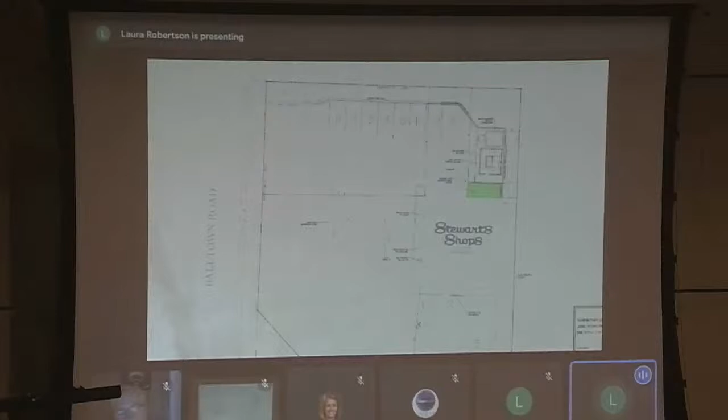For whatever it's worth, Mr. McPartlin, I focused all of my comments today for the ZBA recommendation on the area variance and the few items we had left over. We would still have to take this to site plan if you come back in front of us. And I think we can have a good discussion around what you could actually do with that freezer, because we did bring this up last time.

I'd recommend that if there was a way to get this to look as best as it can, that'd be something we'd definitely like to hear about. Yeah, I'll return and review. The one thing is that when you do change the paint, the freezer matches the building better.

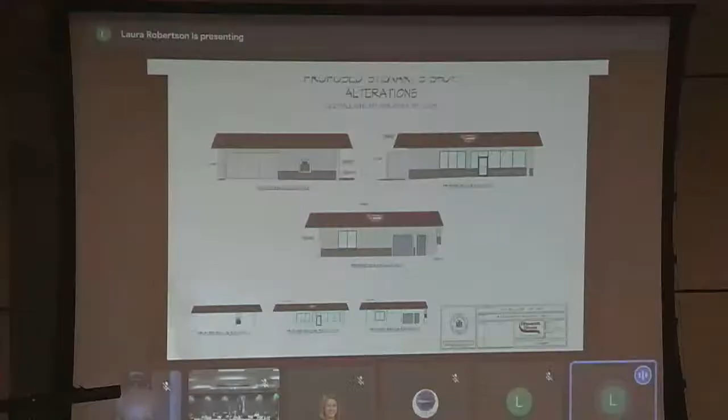While it is an ironclad box, I'm not disagreeing with that, it is what it is. I do my best to not lie. But I think the paint will be a little closer when it goes to the hardy board, so we'll bring it into a little bit better. But I'll see if we can screen it in some other way.

Thank you. So the other question is, are there any other conditions we're going to be looking at for this site plan? I think if I recall, it was pretty straightforward. It meets all the requirements as long as they get the area variance from the ZBA. That's the only critical path item, right, Laura?

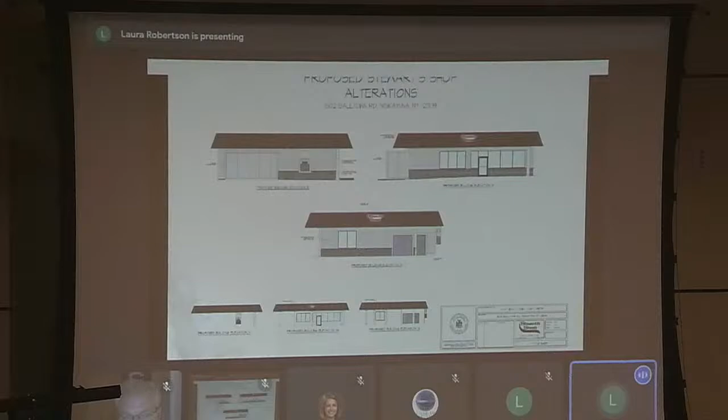Yeah, the only thing Complete Streets brought up was to paint the crosswalks because they're starting to get a little faded. They also noted that this is a significant outdoor seating area for Stewart's, like high schoolers eating ice cream, and there's really limited outdoor seating. So they were wondering if, since we're touching it, we could look at places where we could add more outdoor seating.

But those are site plan items. Yeah, we'll review and look, but I think, to Mr. McPartlin and Mr. Khan's comments, the site itself is very constrained. Unlike other Stewart's, we don't actually own this land, we lease it. So one of the other constraints here is the long-term ownership of the property, where we can't alter it. In sites that we own, we're more willing to work to do different things. Here we are a tenant.

So the other question is, are we close enough to call for a tentative resolution since we're 3 weeks out to the next planning board meeting, and the ZBA is meeting prior, right? What, 2 weeks, ZBA?

So we could have conditions for the paint and striping being updated, and we could also have a condition at the ARB to take a look at the freezer cooler to see if there's any kind of cladding that can be put on it, or if the colors are adequate, at least make a recommendation. We could do that if everybody thinks that's okay, or we could wait to the end of the month.

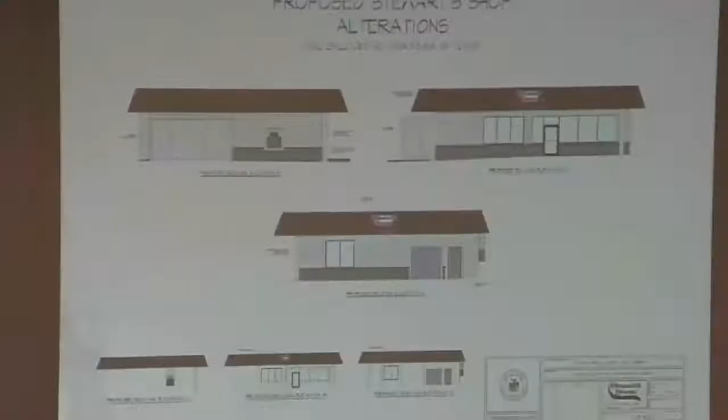Yeah, all refrigeration. So one of the things we had talked about earlier in a previous meeting was the location of the condensing unit and the condenser to be put towards the rear. Also there's going to be piping generally attached to the outside of the coolers. There are jackets and sleeves that can cover the copper piping, or insulated jackets that can go over them that are a little bit more appealing visually.

So if you know the actual brand, I'm sure they have a shop drawing or a layout drawing that would show that. It may be helpful to present at the next meeting so the board can take a look at what the unit actually looks like. I can also get pictures.

So the question is, do we still go forward with a tentative resolution, assuming they get their area variance as a condition? We'll know whether they got their area variance because it's ZBA. And if we're not happy with what your research shows, we could always pull the resolution.

Yeah, and I'm okay with the tentative resolution, but to the points we've all made here, I think you know our desire relative to the look of the freezer and the general area. So if you can do your best to accommodate that, at least then we always have the ability to pull the resolution, but if we didn't have to pull it, that'd be a best case.

Yeah, I'll drive that way back and look. I know that unlike many of the other Stewart's, there's no parking in front of the building, which again is atypical. Again, because it's a site we don't own, and we didn't design the building, we retrofitted it. But I'll take a look to see what we can do.

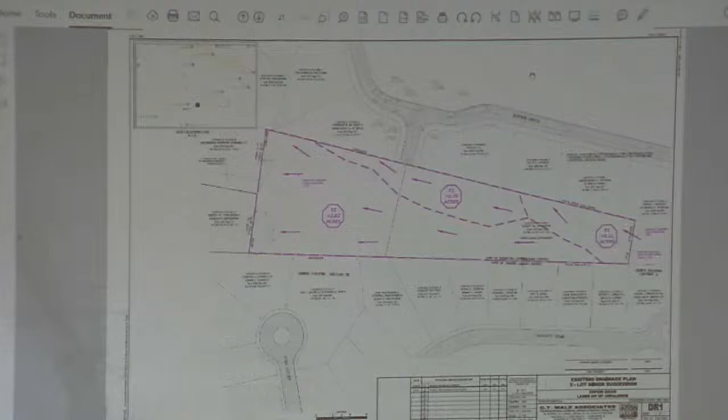Okay, since the last time we met— Oh wait, Owen, can you identify yourself? Yep, and also pull that closer. Owen Spoolstra with CT Male.

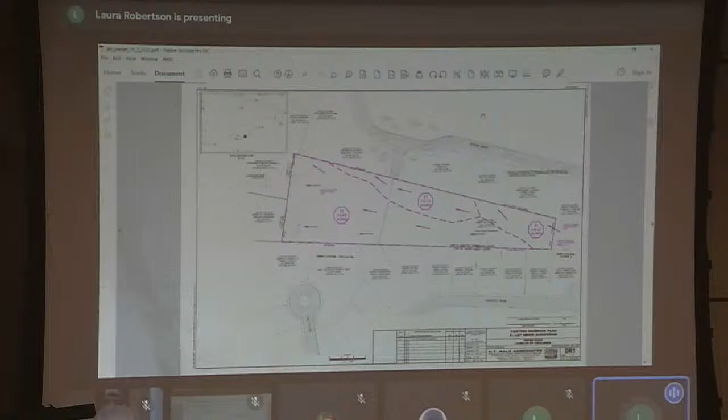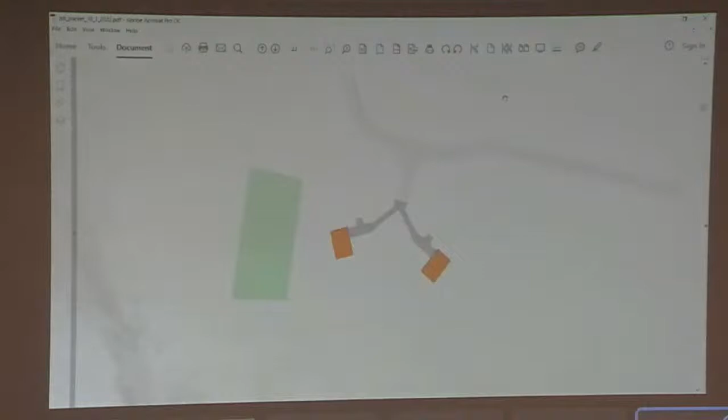From the last time we met, we prepared a drainage report for the site. What we're proposing is still the swale along the northern property line to divert the water around, so none of the water from the driveway or houses will drain towards the north or the Empire Drive lots. That water would flow from around the houses, either to the north of the houses or the south of the houses, and be directed to a...

...gravel diaphragm at the rear of the proposed area, to be cut towards the rear of the house on lot 1, the rear of the lot yard. That gravel diaphragm would take any water that's gotten concentrated, would direct it back into a sheet flow, and that flow would flow overland through the filter strip that's approximately 120 feet wide.

And that's the treatment practice that we're proposing. The Stormwater Design Manual allows for filter strips to be used for this kind of situation. The theory behind it is that the water is sheet flowing and it will perk back into the ground because it slows down the velocity, dissipates the velocity of any concentrated flow, and so it gives it a chance to percolate back into the ground. So that's what we proposed with this site.

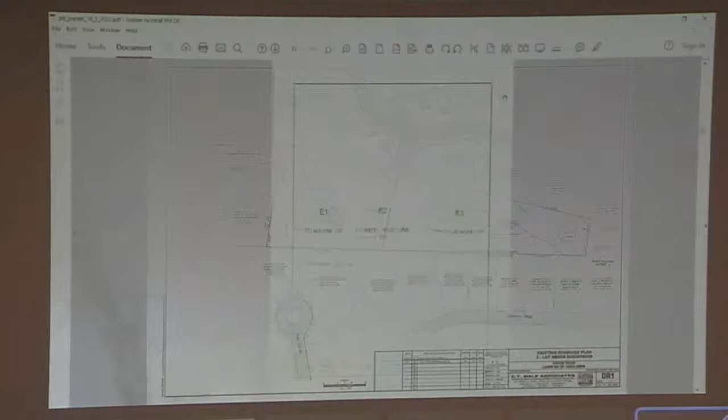Page 21 of the packet, found it - it's where it shows E1, E2, E3. If you look to the far right of the drawing, there's what looks like a copy and paste error. It includes 18 self-service vacuum spaces. Did you catch that? I caught that - I don't think it's in that one now. It's at the top, I believe, in the one that went out. Something was in a copy-paste and probably ended up in the drawing. That was from a Hoffman's car wash. Yeah, that would make sense. Okay, just wanted to point that out.

Okay, no more design work - we'll capture what needs to be maintained and send it to the town designated engineer to get an overview of the work. And then the tree council will also take a look at the large trees that were mentioned tonight, at least to identify where they're located, whether they're to be removed because they're within the building envelope, or whether they're outside of it. The tree council will walk the site and help us out with that.

Typically, all trees within the building footprint and the driveway are allowed to be removed. The tree council is really just looking at clearing on the edges - if it's close, then you save it, or they flag it. But trees in the footprint of the house can be removed.

Understood, but the public had a concern with the large oaks and we're not sure where they're located. So as they do their walk, maybe they can help us out with that - whether they're to remain or not. It would be nice to know.

I just had a question - the area for the filter strip, is that put into a conservation easement, or is it just maintained as part of the stormwater system as an open forest area? How does that work?

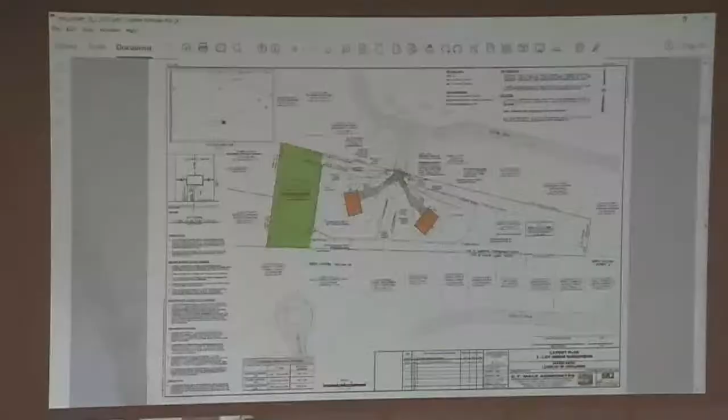I thought you did a very nice job with this stormwater report. I would propose that whether it's Owen or the TDE, because we did have quite a few people with concerns about drainage, someone kind of explain that report a little more thoroughly. I looked through it very carefully, and you could figure out the design inputs and the outputs. But one of the things you have going for you is very good soil, the best of the four soil classifications. So it might be good to explain it in a little more detail, how HydroCAD works, from a really top level.

That's my suggestion. Sure, now or at the next meeting? Maybe at the next meeting, not now, but at the next meeting.

Just a concise explanation of that, because it's a nice document, but I think some of the neighboring people might not be familiar with a drainage report. Okay, and that can go hand in hand. If we get any comments from the town designated engineer that you need to respond to, I guess we can do that all at once. That would make sense.

All right, so we'll get that off to the TDE. I think that's it, right? Is there anything else that we need to take care of right now? You're getting close. All right, thank you, we'll get all right, thank you very much.

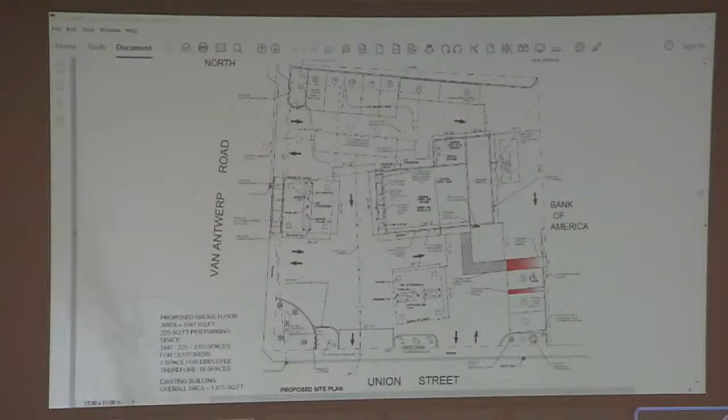This is the one that was in the packet. How does the latest proposal differ from what we have that was in our packet, Mr. Kaufman, for the lighting? Just anything in general. I do have some renders, some better renders. I can't remember if I emailed them to you or if I have them on paper here. Let me show them to you, I can pass them over.

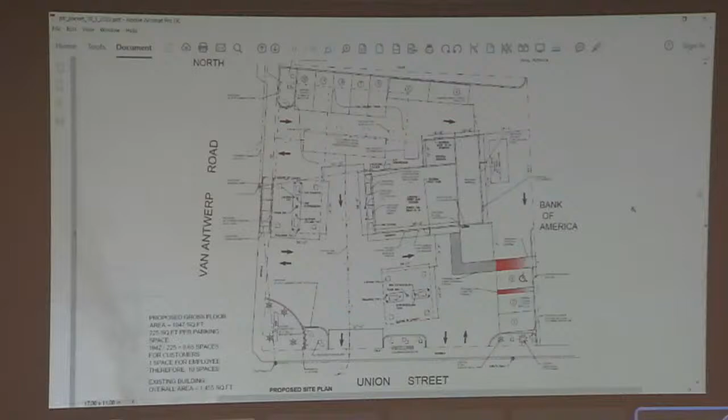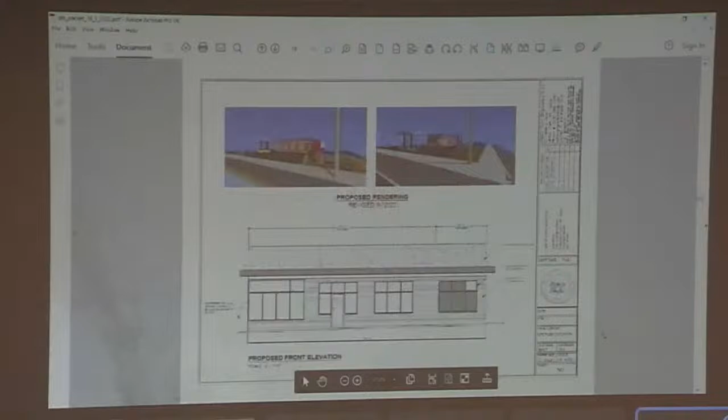Oh yeah, that's for the old one. This one's more zoomed in to show the actual doors, on the one being passed around. So that one shows there was a door in the storefront to the left that's being filled in. Yes, yeah.

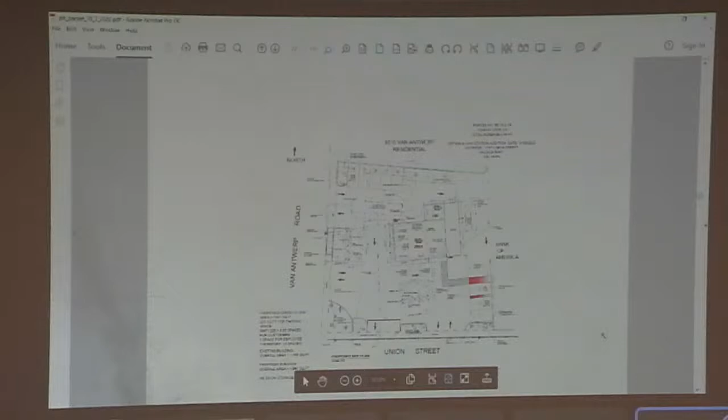So a couple of the updates are the southwest corner has the ingress and egress changed to just the egress. Yes. And then the other thing along Van Antwerp Road shows a raised sidewalk and curb. Yes, that's the next thing I was going to discuss.

So I had a chance to take a look. I actually saw a gas delivery the other morning there, and the tanker truck does come in at the back of the lot, does come back out, watched it fill up. The only concern I have about improving the sidewalk with a raised section in that location is that, because of the proximity to Van Antwerp Road with the county that plows that road and also maintains the sidewalks along Van Antwerp, I think that concrete curb and sidewalk is going to take a pretty good amount of abuse from plows.

That was one thing I was a little worried about too - how are we going to raise it, and the question is how much to raise it. If we raise it up a half foot, yes, it's going to take some punishment from the plows. And then also, what kind of buffer area do we have? Do you have a buffer area of asphalt both on the property and next to Van Antwerp?

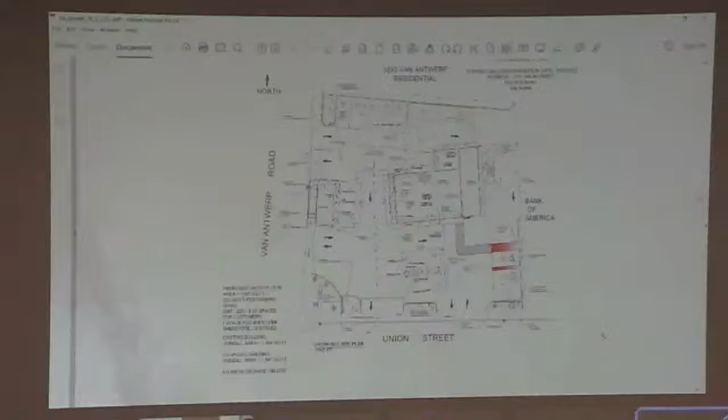That's a good question. If it did that, I'm not concerned about plows at all. I probably do want to raise it there because that's a straight line, and that's really acting more as a deterrent for cars cutting through.

Okay, you're talking about right at the corner itself, right at the intersection? Yeah, as you know, Van Antwerp has a raised sidewalk until it gets to your parking lot, the applicant's parking lot. So then it's going to go down because there's a road access, and then it's going to go up in the middle, then go down, then go back up at the end, I would assume, to delineate that this is a walking path, so that all plows would see a straight line coming down Van Antwerp.

So you're talking about all the way along Van Antwerp? I thought that's what would be proposed, but you're not incorrect. We really focused on just by the pumps in our discussion. That's what we were focusing on. It can be revised, I just want to ask the question.

No, if it were a straight line all the way to the corner, I would be less concerned about a plow being able to find a line of sight. So you're saying if we get curbs along all three spots, basically raising it up.

I think what you're saying is on the site plan, right where the monument sign is and also the telephone pole. So where's the curb? The curb is just west of the telephone pole proposed, right? The telephone pole would be in the sidewalk about a foot. Is that what you said?

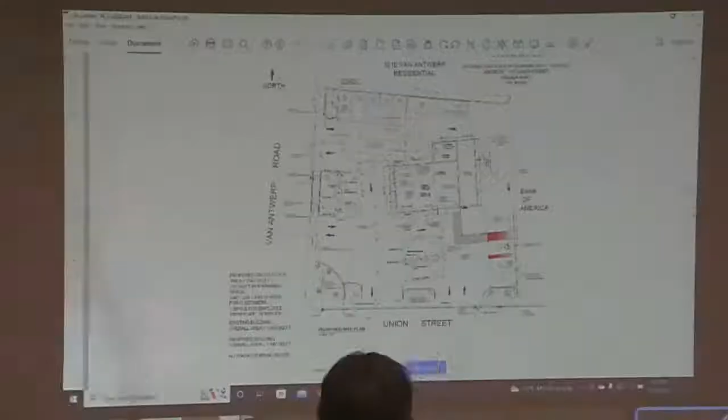I think the discussion is, if you provide a raised sidewalk over here, am I getting that from the local plans point of view? That's what they're trying to do.

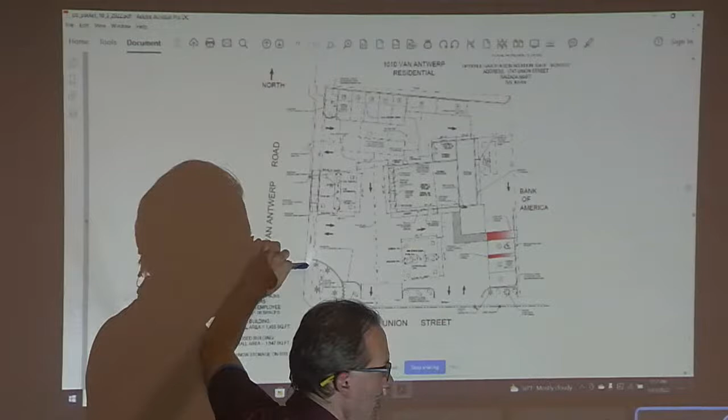Consistent with the rest of Van Antwerp, to raise the sidewalk over here. And then the other question is also, do we put some kind of raised sidewalk over here also, and in the middle also? Three locations, is that true?

I think that's a given, that's where we... The question is, do we raise up? Yeah, see, that's a good image right there.

You could just follow the line all the way down. Basically, are we gonna raise, this goes down right here to this driveway or this house, and then there's nothing raised. So the question is, this has already been removed, of course, but are we gonna raise up this area? And then scroll down.

Are we gonna raise this area over here? Actually, I have a question for Laura. Can you go back to the other perspective? No, just the other angle that you had of the streetscape.

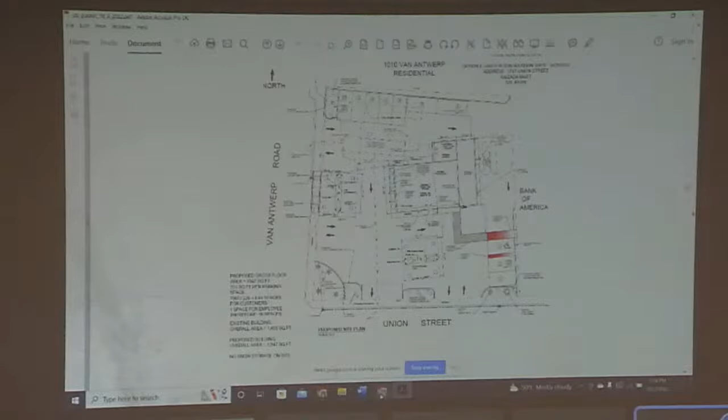Does the jurisdiction change between Schenectady and Niskayuna? The sidewalk is not aligned with the sidewalk that's on the applicant's property. Why would that not continue all the way straight down?

There's no jurisdictional change, but sidewalks don't have to be directly on the edge of the road. If they are directly on the edge of the road, they often have that curb like you see here. This isn't the most beautiful of inset sidewalks, but a lot of times you'll see an inset sidewalk that has grass - edge of pavement, then grass, then the sidewalk. This just happens to have edge of pavement, then asphalt, then sidewalk, which I think is another reason why it feels like you're walking through a no man's land, even though you have a concrete sidewalk going through there. Mr. McPartland raised this last time, and I was looking at it just from the extensiveness that it would require.

This sidewalk eventually should actually be raised in strategic locations around the entire property, shouldn't it? And that was what Mr. Fromm further said, not just the 3 points you mentioned, but also on Union Street. I think that's part of the complete streets.

When complete streets, I don't know what your complete streets plan of the whole town of Niskayuna is. Because the sidewalk becomes flat on Union by the bank, right?

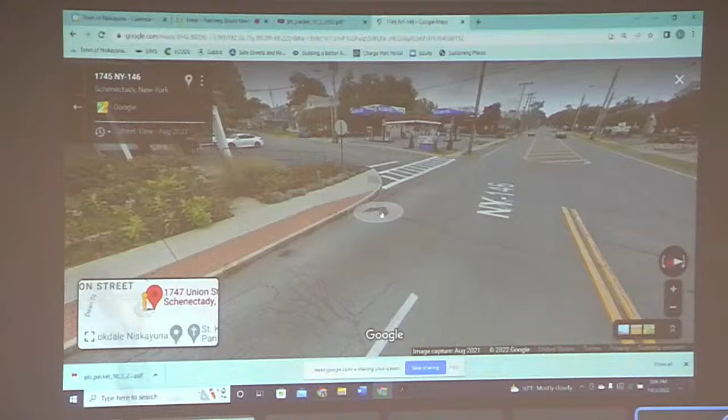Is the client allowed to do that? Did Metroplex do that work, the sidewalk improvements there, to that corner? I'm not 100% sure, but I believe the line between the town and the city is very close here. Yes, it cuts through half of the pizzeria and then comes down and slices back through the rear of Stewart's property.

It's unfortunate that as a pedestrian, when you enter the town of Niskayuna, you're greeted with less of a sidewalk, I must say. Well, if you go onto Molino, that's raised.

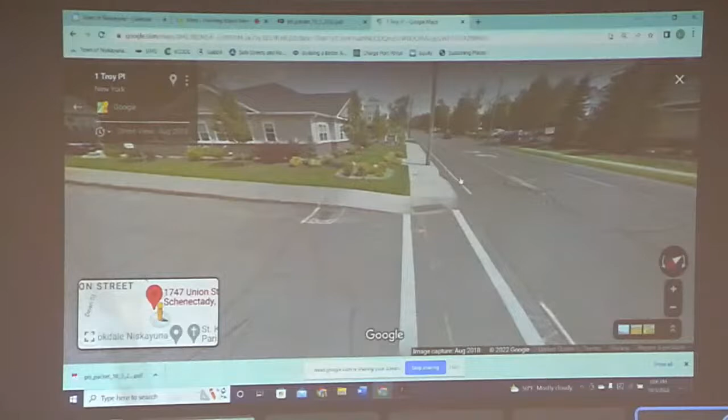Molino got a bus stop there, yeah, it's raised over there. We did that when we did the... correct. It's just inconsistent, but I'm okay with concrete. The grass is nice, but it's hard to maintain that small strip, especially winter after winter.

It's easier with road salt. So you're talking about actually curbing Union Street as part of this site plan? Well, that sounds like even more work. I guess, echoing Mr. Laflamme's question, I was not aware that there's no curb on Union Street.

There's no raised curb on Union Street, correct. Even on the corner, which seems like an area where you'd want a raised curb, because that's where pedestrians queue to wait for a safe moment to cross. There's a crosswalk, but it's not raised, it's flat, and there's not even a light that says this is time to walk, this is not time to walk.

Raising the sidewalk there—right now there's an ADA ramp there, but nothing's raised there currently. We just have the poles. For all intents and purposes, it's basically flat on the entire property, at road level.

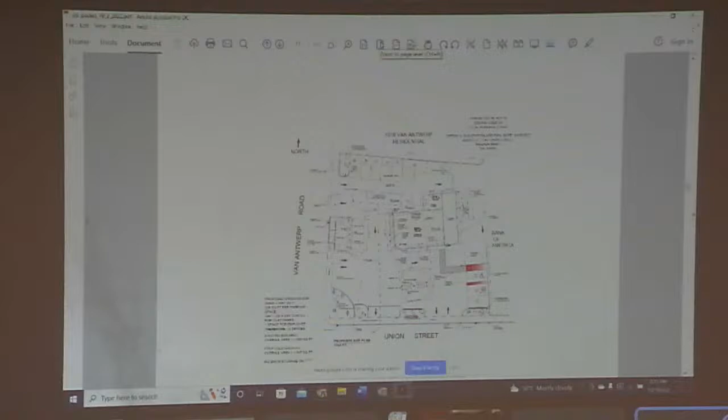Next up is 2209 Nott Street, and that's the broken in. We have Mr. Nicky online tonight. Yes, good evening. How are you? Great, thank you. I think what we just was, we have a brief discussion.

We don't have anything new as far as submittals, but you're going to talk about maybe a discussion with Metroplex or something along those lines? Yeah, just real briefly, we will have our drawing updated for the next meeting. I didn't want to be on the agenda and not address the board. I did do a walkthrough with Jamie LaHutt from Metroplex, myself, a representative for Carver, and Dan Lang as well of Lang's Pharmacy.

It's my understanding that Metroplex intends to pave the parking lot on the Clifton Park Road side of our building beginning 2 weeks from today on October 17th. I'm under the impression it's going to take between 3 and 5 days. And at that same point, it will not be raised, but they are going to stamp an area to essentially extend the sidewalk along the Clifton Park Road side of the building just past our side entrance door, which helps in terms of the plans that we are trying to get approved.

For both surface and also to delineate where the sidewalk is from where any outdoor seating area and any parking area might be. Other than that, I don't have anything more to report except that work apparently is being done 2 weeks from now, and myself, a representative for Lang's, a rep of Carver, and Jamie LaHutt from Metroplex all met to see exactly what they plan to do, and that's where we're at.

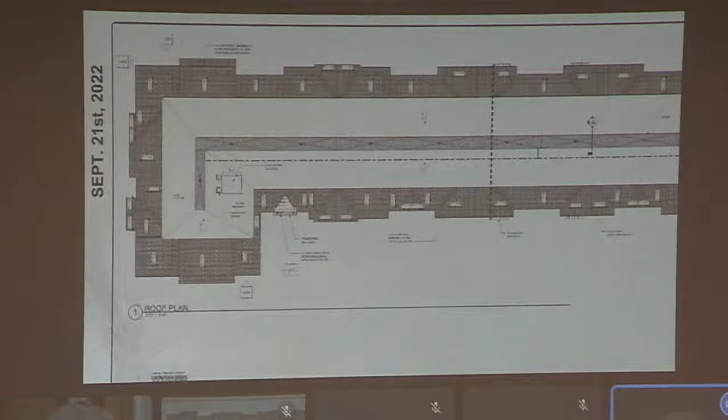All right, so that's a good catch, and we'll ask Mr. Funday or his engineers to give us some more details about what the plan is there. We didn't miss it, right? It's not there. No, add HVAC units—this is a model that's not, it's a massing model, it's not a working document, I would say.

Yeah, because the other thing that's kind of missing is really the elevations—how high is this compared, from the decking where the units would be, which we don't know the height of, to the highest point. But we have to assume that the dimensions on the other pages and the applicant so far are still active, right? The 41 feet, whatever—they have to keep themselves under 41, that's all they have. But what I'm talking about is just the distance between the decking where the drains are to the highest elevation, the 41 feet or whatever. What is that dimension?

What is the height of any equipment that's going to go up there? Is it going to be within that dimension so it's not visible, which was our goal? I'm a little nervous as to why they didn't show it.

We'll ask them to add the HVAC units to the roof plan and add dimensions. I think it's a work in progress, and that's where we're at. But it appears to be pretty good, and if it truly hides everything, I think that's what we're looking for.

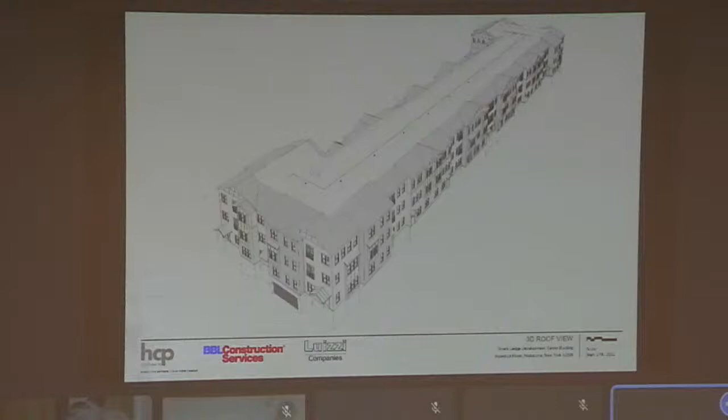It's a pretty tall building, so I think you're going to be hard pressed unless they have large units. They don't have large units because there's so many units. We should really get a summary of what their proposed mechanical package would be.

That would probably answer a lot of questions. The only other thing I had in my notes, and I know we're probably not there yet, but if our approval is going to be for this building and for the 3,000 square foot outbuilding, we need some information on that outbuilding. We really haven't seen anything about that. So whether they're going to phase that in, and they're not looking for approval at this time for the 3,000 square foot building, I guess that's fine, but we just need to understand what they're doing there. What's the design going to be like, et cetera? And if they're not ready, they're just working on this one, that's a different phase, that's okay too.

They had said to me, because I asked them about that, that they're working on a possible tenant. You could conceptually approve the commercial building with more information about it, and then just do a tenant change when they finally have a tenant, or potentially they'll get a tenant here quickly and then we can start talking about it. We can approve it if they provide us some details of what it's going to look like. You're talking about a single tenant for the entire building?

Yes, I think originally they were talking about the coffee shop being in the building, but I think now they're talking about potentially a coffee shop restaurant being the outbuilding, and then some other things being in the building. I can't remember what he said.

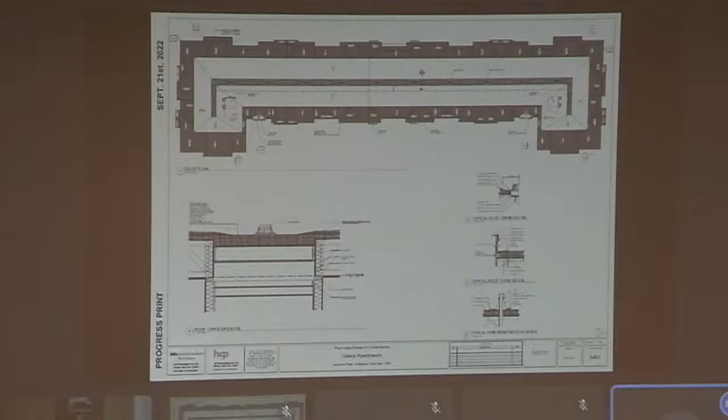Any further questions or discussion on this? Nope. Okay, thank you. That brings us to 2239 Van Antwerp Road, a two-lot minor subdivision. We have representatives here tonight for that application.

Good evening. My name is Pat Rose, I'm with Van Gilder Associates. I'm here tonight on behalf of Elizabeth and Joanne Ryan to answer any questions you may have for the two-lot subdivision on 2239 Van Antwerp Road. To recap, these are conforming lots and will include public water and sewer. The 2.08 acre property will be subdivided into a 0.56 acre and a 1.53 acre lot.

The items from the last meeting that were added to the map include drainage. The direction of flow is to the rear of the property, and there's a note 13 on the plan that alludes to that. Number two, the fence and signs were added to define the wetland buffer. Number three, the trees were noted on the plan as well, over 25 inches in diameter, or 25 and more.

Okay, thanks. Mr. Laflamme agreed to take the lead on this one. Sure, so I'll turn it over to you. Thanks. It looks like it's pretty straightforward. The delineation of where the wetlands are and the distance setbacks that we have, the additional 25 feet, all seem pretty satisfied, and the flow satisfied.

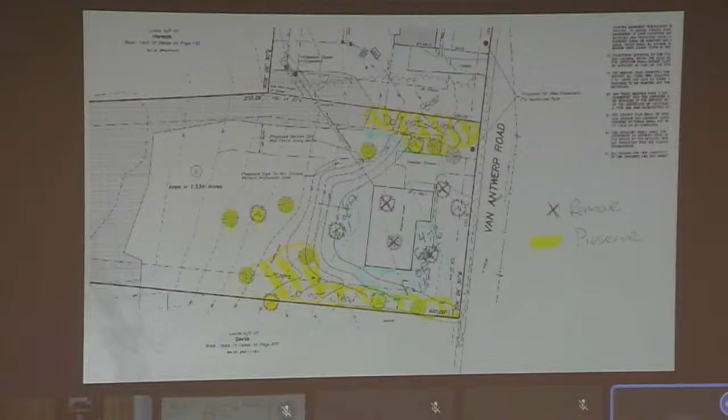We'll get the paperwork in. Not to delay the meeting, but this design actually shows signs to delineate wetlands. Is that just for the construction period, or is that something the applicant's actually doing on their own?

I believe they're going to be permanent signs on the fence, from what I understand. On the applicant's split rail fence? Yeah, it'll be on the split rail fence. I think it's a good idea.

Just so it's always there, so people have an idea what it's for. Otherwise it's just a couple of pieces of fence. The first homeowner might get it, but you could sell the house, and we know what happens down the road. Yeah, we do. Thank you, we appreciate that.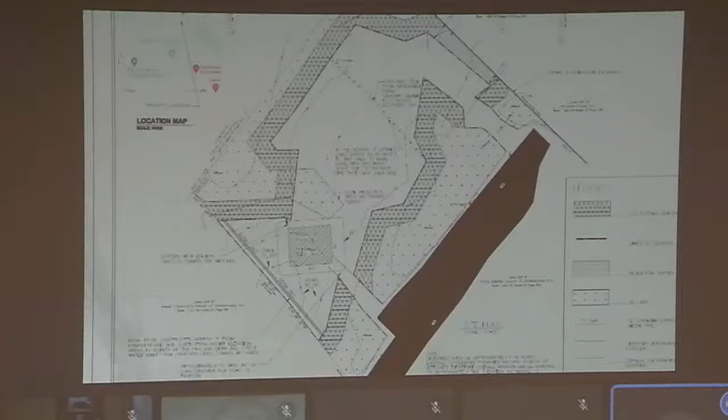But the plan is going to require updating based on Mr. McPartland's comment on the grading. I do think you need your engineer to look at it one more time for grading. So will you send me an email exactly what needs to be done?

And this was postponed because of the evaluation from, was it Army Corps and the archaeological comment, which are resolved now. So the plan gets updated and the number of trees are identified and the location identified. But I think we're in pretty good shape here also, Mr. McPartland. Sounds that way, yeah.

So do you want a tentative reso pending those items? They're not large. That's what I was going to ask, if we'd be able to have everything in the next couple of weeks, have this done. If you can, just send me the email, I'll get a hold of Tess and have her send something to you. We can then get your approval at the end of this month versus sometime in November, at least. Yeah, that's fine.

We're pretty busy now, so we probably won't start this until spring. Okay, all right, so if there's a problem and the information doesn't come in, we'll table it till our November meeting, but if you can get everything in, we can bring it to closure. Okay?

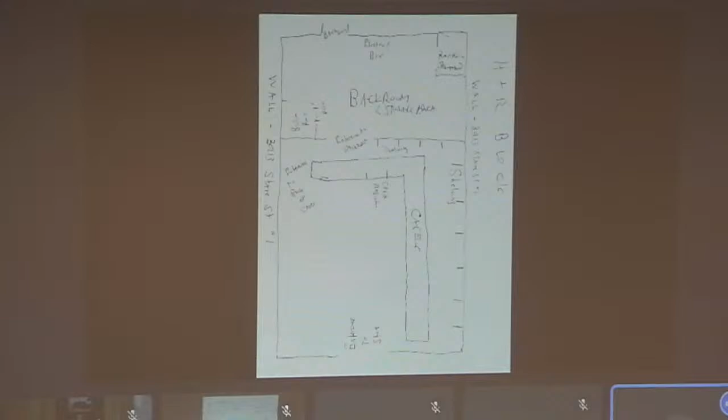Shoki is going to invest about probably $5,000 to $7,000, and what he's going to do is put in shelving on two sides of the wall, put glass cases around one side and part of the other side where there'll be a cash register, and on the back will be storage for inventory. So why we're here tonight is to seek a variance to approve the retail store and to install the shelving and case displays.

All right, so basically there's no variance, it's just a change of tenant. Yeah, just to be clear, it's not a variance. And it's an approved use, and as you stated, no marijuana, which Niskayuna has restricted, so it's compliant. It's just considered retail. The only thing that's special about it is that we don't allow the smoke shops to grow into cannabis in our town. They will not, and you understand that.

Laura, when the planning office reviewed with respect to the requirements of section 220-4, shall not be located within certain distance of schools, does that apply to neighboring municipalities?

Sorry, I wasn't clear on it, but I looked in the neighboring municipalities anyway. The closest thing I could find was a daycare that was still 1,000 feet away. And the Woodlawn School is the closest school I could find, and that was more than 1,000 feet away as well. It was unclear, but I figured I would look. Yeah, just wanted to ask. It's a good question, I had the same thought.

Good question, yeah, I mean it's unclear, but I think we'd fall on the side that a school is a school, it doesn't matter which municipality it's in. Right, but right now this is clear within the town. I looked, there is a daycare that's a couple streets away, but it's still more than 1,000 feet.

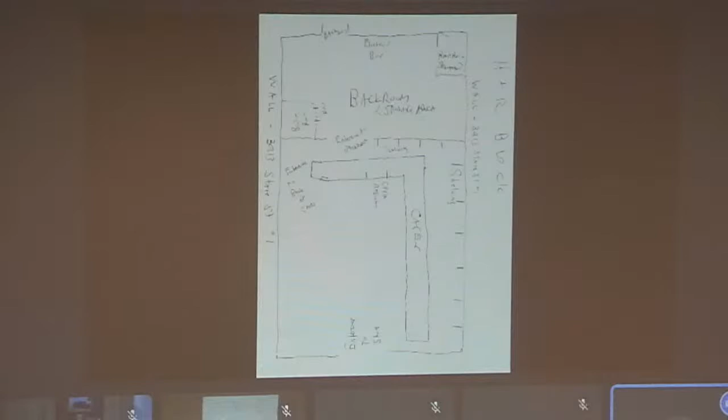I mean, the intent of the store will be clearly for adults, right? Oh, yes, absolutely. Would there be signage to that effect? There will be, we have to plan on that. We'll be working on signage.

And CBD is allowed, Laura, right? Yeah, I haven't had a chance to check with Elena if there's a certain concentration of CBD that then triggers something further, but for regular CBD, like we ran into at ShopRite Plaza, it's okay. Yeah, just regular, I think it's got to be under a certain amount. I talked to you about it on the phone. We don't sell anything more than the legal amount. You can stand up to the microphone please, we just make sure we catch you on the record. I talked to Laura about it, we don't sell higher than what the CBD legalized limit is, just to confirm that.

All right, well, I mean nobody has any... this is a tenant change, right? Tenant change, and it seems like it's compliant, so I don't see any issues. And if the signage isn't decided, I mean if the signage submitted at some point in the future is compliant with the town code, I don't think we need to look at it, right? It's compliant, if it isn't compliant, obviously it should come to the board. So I guess we're back to another tentative resolution approving your tenant change with conditions that signage meets the requirements.

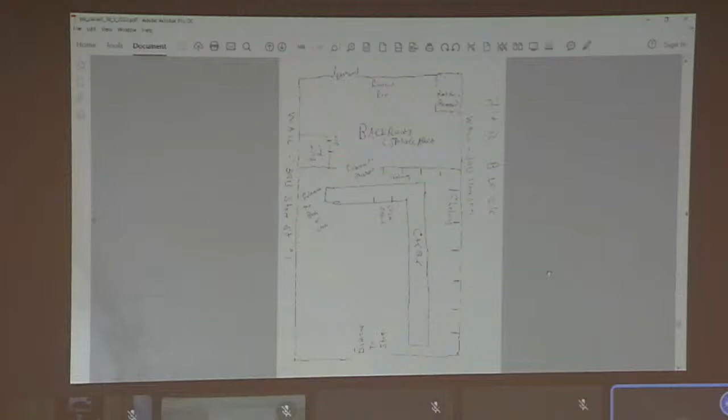So you need us to give you the plans? No, if you're not ready we can just condition it that you'll submit a building permit for the signage separately in the future. But I guess it'd be good if you could get it done, and then if there's any issues they can be identified, and if we have to take any action or make any recommendations we can take care of it, and it'll help you out. And it's worth your while to make the signs compliant.

Right, absolutely. Some tobacco retailers have an area where the tobacco can be consumed, I'm thinking of a cigar shop on Central Ave in Albany. Will there be any consumption on site? No, there's no smoking, no consumption on site, it's gonna be all retail.

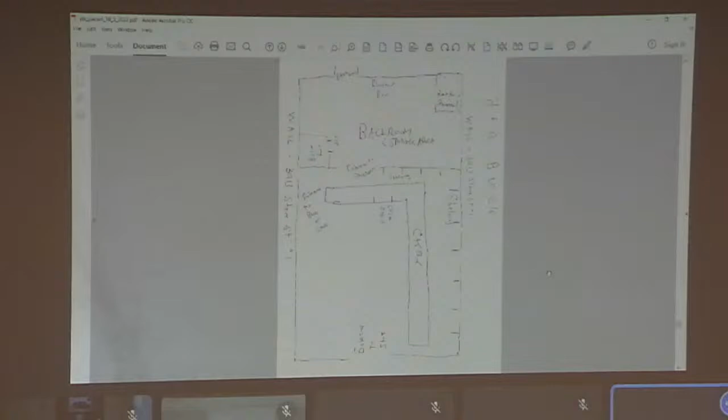Just come and go, yeah. And plus we're not doing any major work in the space, we're basically getting showcases for displays and glass shelves on the wall. So we're not doing any electric or water supply work. It's basically ready to go, all we have to do is order the showcases and glass shelves for the walls, that's it.

And you'll be selling cigars and pipes and tobacco and accessories? Yeah, accessories and tobacco. Okay, and your name sir, just for the record? Showkill Harvey. Okay, thank you.

All right, so we'll have a tentative resolution, and again if you do know your signage, if you can get it to us we can make sure it's compliant and take a look at that. If not, we'll just condition the resolution as a follow-up, okay? Thank you very much, all right thank you, we'll give you a double thank you for being so patient, we appreciate it. All right, you're next, I assume you're next, maybe not.

Next is Hickory Farms. I think they had a sign before, but apparently they didn't get approval, and they're looking to do the same thing again, right?

So they got approval from us for the temporary building last year, which worked fine, but they also put up a temporary banner that we struggled with, and then they moved out before we resolved that. Well, they're only seasonal, right? Yeah, they're only seasonal.

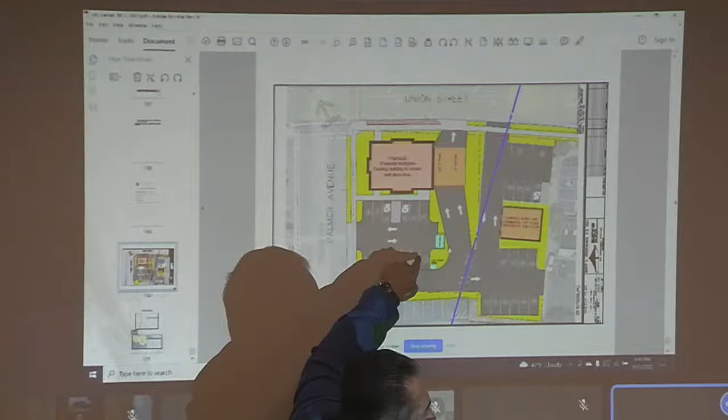Is that what we're concerned about? The queuing? If I got rid of this and had an entrance, with parking somewhere here, not there... this is my queue line for my drive-through. So now, in order to get in or out of my parking, I'm in the queue line, and people have to wait for others.

There would be a pretty long queue line for a bank. It just gets really, really difficult. I will bring it up to my boss and the people that actually make the decisions, but that's just the feedback I'm assuming I would get. I think in our code, for standards, for a bank we ask for you to be able to queue 2 or 3 cars, not like 6.

Yeah, I'm with you 100%. There's something you can work here with the space to cut this down to one entrance and have it be accessible. I'll bring it up to them — I have a parking lot and an accessible ATM.

One question for completeness: why do you actually want to join the two properties with the roadway to get rid of that? To help it flow better — we just need it to flow better, to make it one site, owned by one person. We want to make it beautiful and big and accessible, and that's it. It'd be easier for plowing too because of how it's all connected.

Well, to that end, if you're going down that route, it sounds like we don't even have to think within the boundaries of the existing green space. You can reshape this however makes the most sense, efficiency-wise, in terms of providing enough parking for your financial institution and providing ingress and egress. I conceptually really like parking behind the mixed use off the roadway. In general, I think this is moving in a great direction. Shared parking is always nice too.

Their comments were to try and reduce curb cuts, which is exactly where you guys landed, and spot 29 would be almost impossible to park in if there were cars in 28 and 27 — it's not really a usable parking spot. So if you don't need parking spots 28 or 29 based on the parking requirements for the proposal, maybe that's an opportunity to expand the green space there, plant a couple trees, make the property stand out. It would help you too, especially since if you have a residential unit above, there's really no sitting area outside for them currently.

And you have 29 parking spaces — I think, without even looking at the evaluation, I can tell you it's high, it's a lot. But again, we're trying to use it as one site. So the 29 spaces — I agree. But I think the bank with the 13 you're showing is probably okay, and definitely the rest of it — if you extend what's 14, 15, 16 to also be shared with the bank, you've got a lot of space. We like parking, we'll make sure it's adequate, but if it's more than adequate, if we can substitute green space, we like that too.

Trees reduce impervious surface and cost too, so it's a win-win. I'll try to get them to put an oak there, we like oaks, we like all trees. Mr. Steenberg is familiar with this board and should be able to do something nice there. But don't be constrained by the way the lots look today.

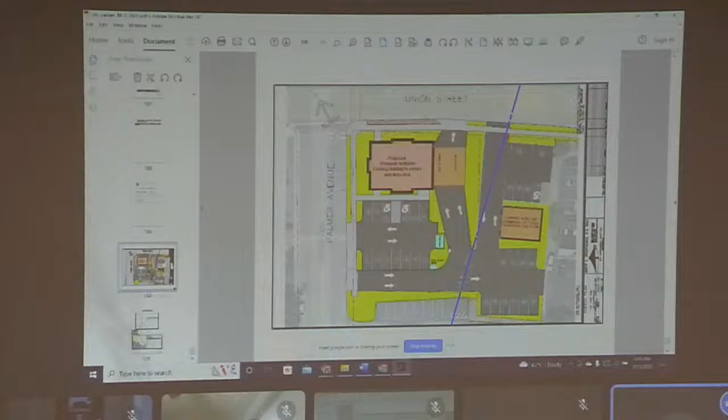Well, it's not clear whether or not you need one. You might, you may not - he might already be zoned for it. My boss told me he couldn't do it in a day, and if I could, I'd get a hero's welcome tomorrow. Can I get an approval? No, you need a resolution, you wouldn't be able to get that today.

But we need to take a look at the parking. The planning department hasn't had an opportunity to look at this yet, right? We looked at it a little, and we brought it to Complete Streets, and there was some concern that some of the parking spots aren't usable. But the actual retail on the first floor, residential on second floor is really not an issue - that's just a planning board matter.

But it would be helpful if you knew the tenant, so you could just do the tenant change now - because conceptually a mixed use building there is allowable by zoning, but if you don't have your tenant you still have to come back for a tenant change. If you have your tenant now and are working through it, just bring the tenant.

I wish I had my tenant. I'd be really good at my job. So you can tell your boss - I'm not that good at it yet. You can tell your boss he's the holdup.

Yeah, because the other building, the financial institution, that's in the city of Schenectady, so you're good there. It's just a matter of, when you combine the uses, whether we can clean up the parking lot and the egress out onto Palmer Avenue - I mean spots number 28 and 29, if they're not needed, I think we'd like to see some parking lot cleanup. If we're approving it conceptually, I'd still say we need some landscaping along Union Street, because it's another place with no shade for people walking.